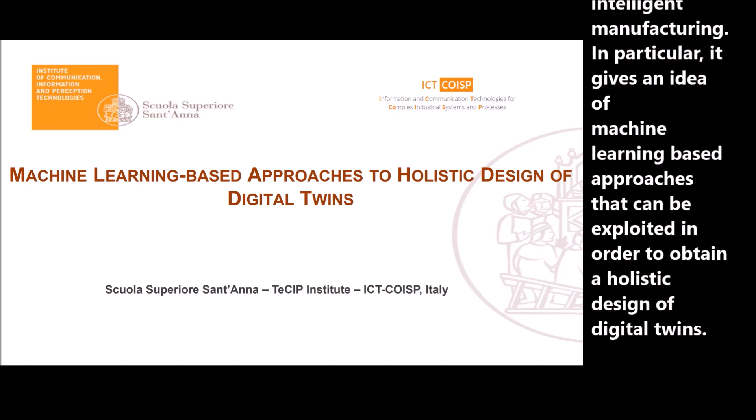This presentation describes a topic strictly related to intelligent manufacturing. In particular, it gives an idea of machine learning-based approaches that can be exploited in order to obtain a holistic design of digital twins.

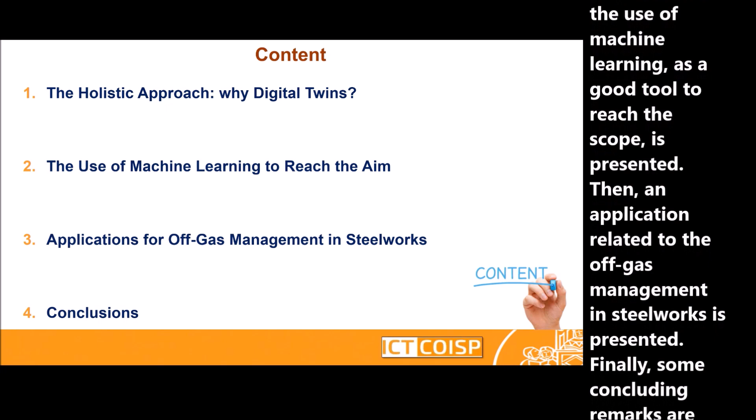The content of the presentation is shown in the slide. After a brief introduction about the holistic approach and the importance of digital twins, the use of machine learning as a good tool to reach the scope is presented. Then, an application related to off-gas management in the steelworks is presented. Finally, some concluding remarks are provided.

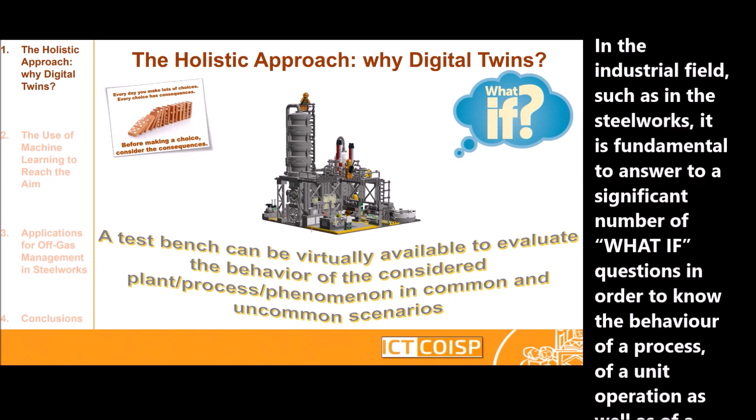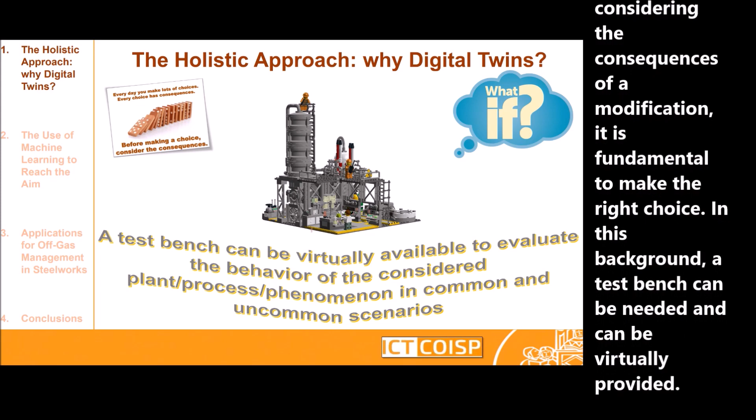In the industrial field, such as in the steelworks, it is fundamental to answer a significant number of what-if questions in order to know the behavior of a process, a unit operation, or a utility in particular scenarios. In addition, knowing and considering the consequences of a modification is fundamental to make the right choice. In this background, a test bench can be needed and can be virtually provided.

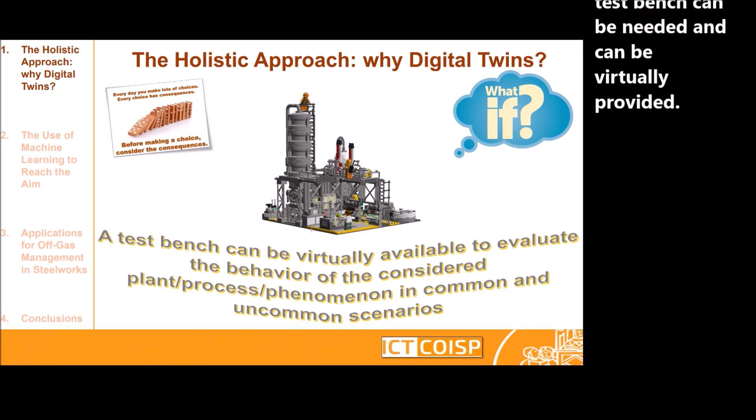The test bench can be called the digital twin of the process, the plant or the phenomenon to be analyzed. The digital twin can be used for different purposes. For instance, forecasting analysis, whose results can be used in optimization studies, could be a good example.

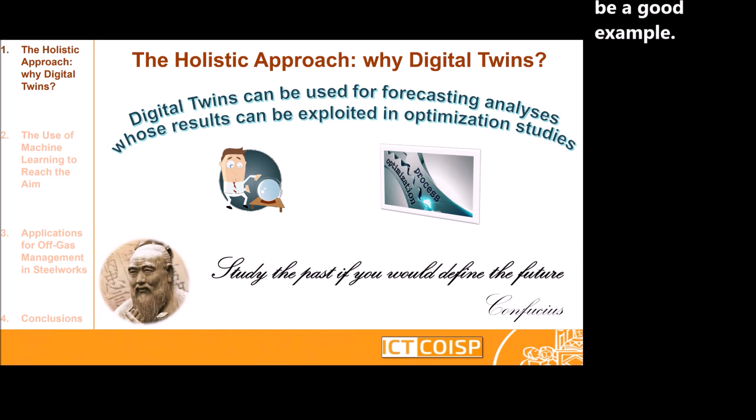The process needs to be considered as a whole, a single entity. The interaction between different components or phenomena can be neglected, and only the aspects which are relevant for a single application, analysis or study need to be considered.

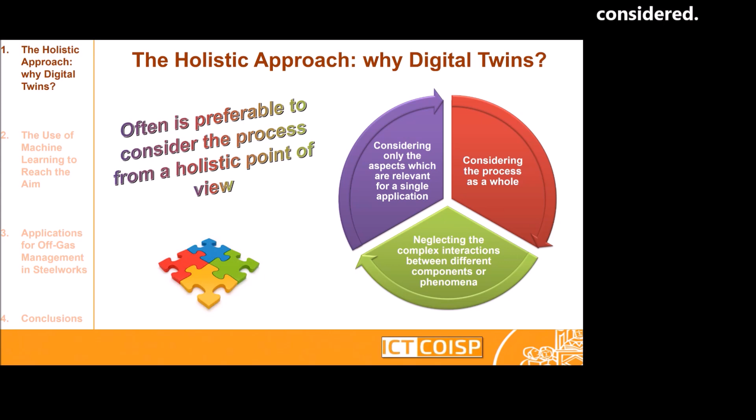By following the holistic approach, several advantages can be obtained, such as less model complexity and computational burden, as well as higher accuracy and efficiency.

Although the detailed approach considers a significant number of details by deepening each single component or sub-process, the holistic approach can address and reproduce the dynamics of complex non-linear processes, avoiding error propagation. This is because its target is only the main objective of the system to be developed.

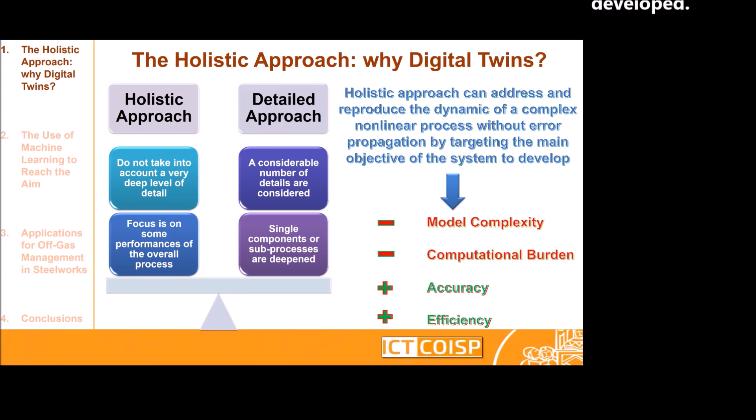Machine learning can help in the development of holistic models in terms of black boxes. In this way, phenomena having complex dynamics that depend on multiple variables can be reproduced without particular issues.

In order to show how machine learning can be used in the development of holistic digital twins related to the steelworks process, an application related to off-gas management in an integrated steelmaking plant is proposed.

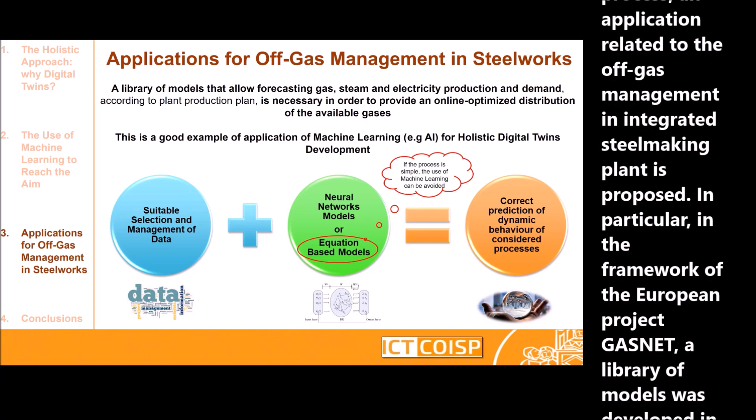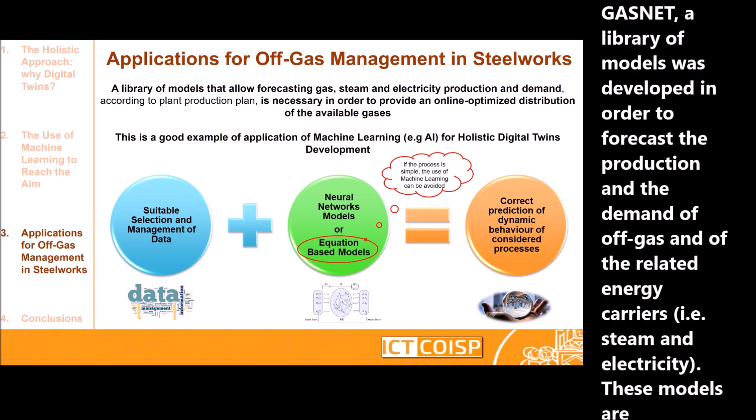In particular, in the framework of the European project GASNET, a library of models was developed in order to forecast the production and demand of off-gas and of the related energy carriers, for example steam and electricity. These models are fundamental to allow an online optimization of the distribution of available gases.

The model's development started with the selection and management of data. Then, according to the complexity of the process to be modeled, artificial neural networks were exploited for more complex phenomena, while equation-based models were designed for simpler processes. In the following slides, the most meaningful models are presented.

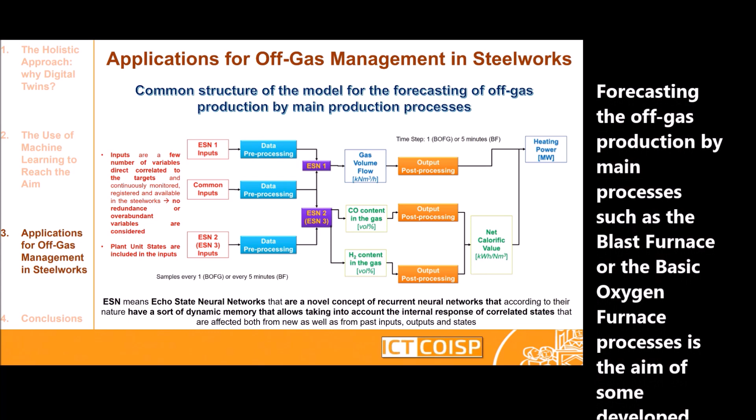Forecasting off-gas production by main processes, such as the blast furnace or the basic oxygen furnace processes, is the aim of some developed models.

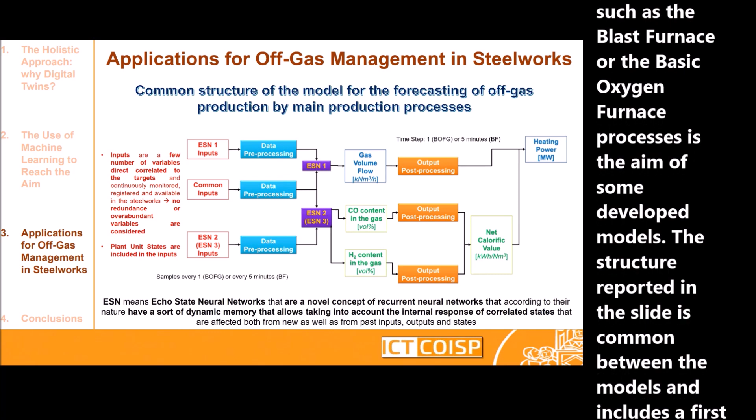The structure reported in the slide is common between the models and includes a first step of pre-processing of the input data that are specific or common to some specific trained neural networks.

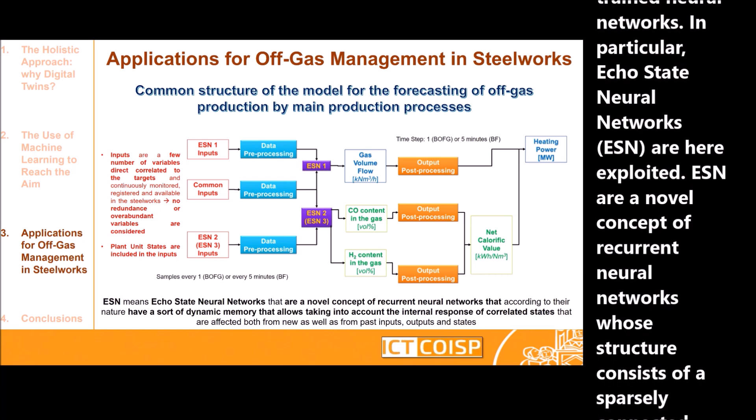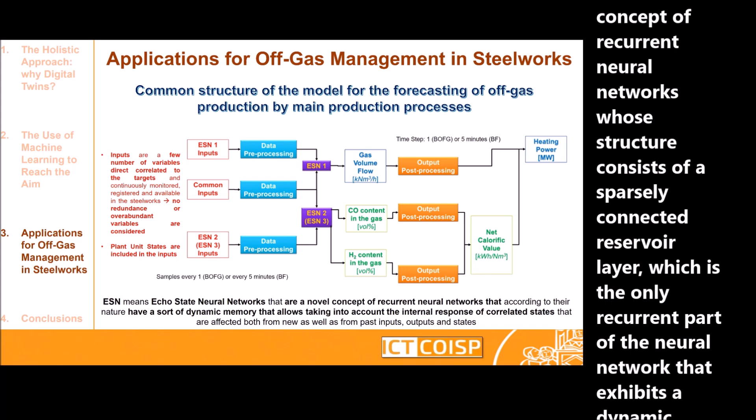In particular, echo state neural networks, here simplified as ESN, are exploited. ESN are a novel concept of recurrent neural networks, whose structure consists of a sparsely connected reservoir layer, which is the only recurrent part of the neural network that exhibits dynamic behavior, and a readout output layer.

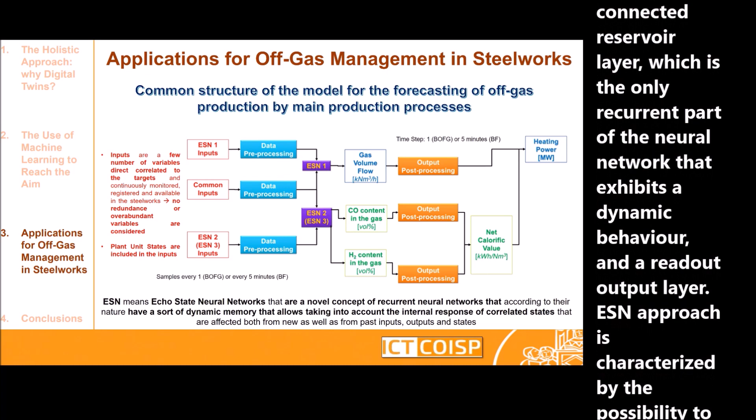The ESN approach is characterized by the possibility to draw on a rich set of dynamics generated by the reservoir in order to perform regression on a target through supervised algorithms.

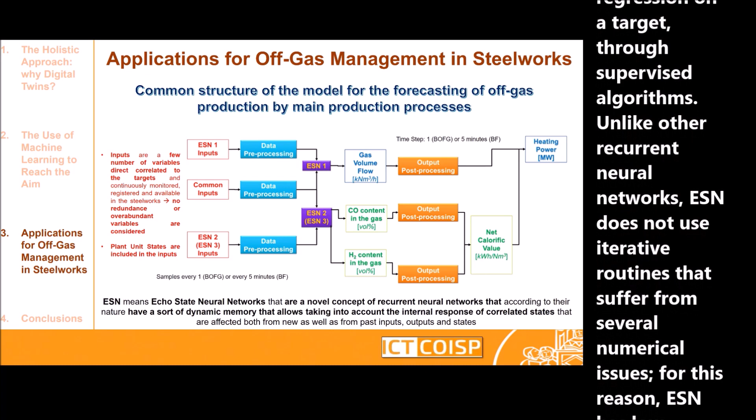Unlike other recurrent neural networks, ESN does not use iterative routines that suffer from several numerical issues. For this reason, ESN has low computational training cost and fast convergence.

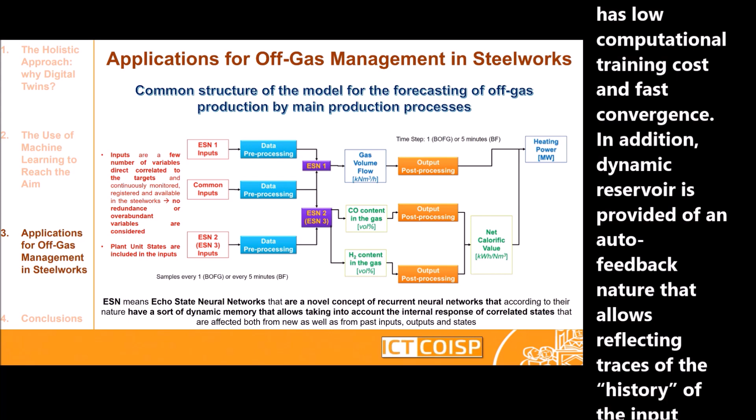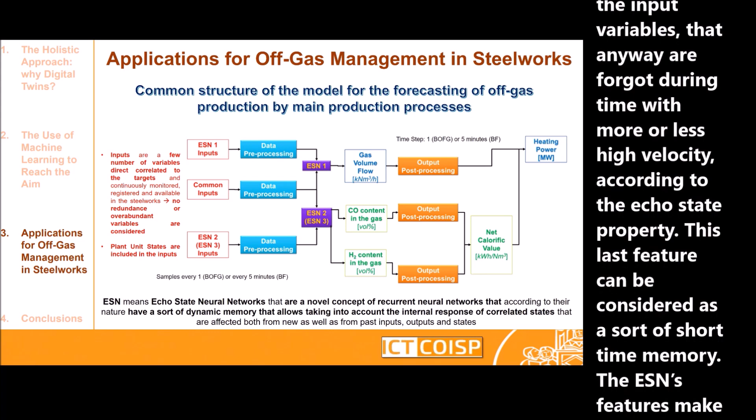In addition, the dynamic reservoir is provided with an auto-feedback nature that allows reflecting traces of the history of the input variables, which are anyway forgotten over time with more or less high velocity, according to the echo state property. This last feature can be considered as a sort of short-time memory.

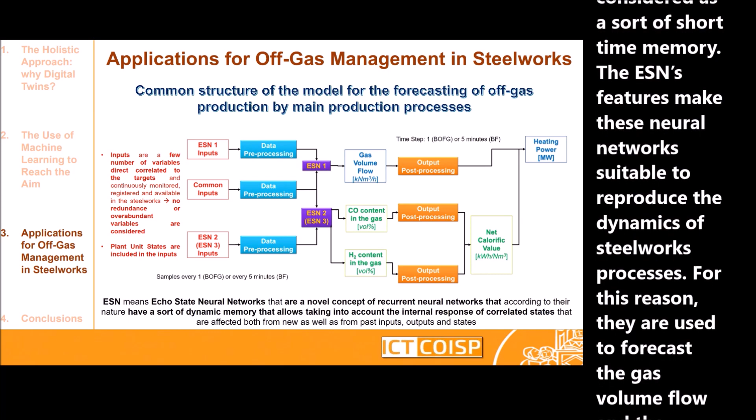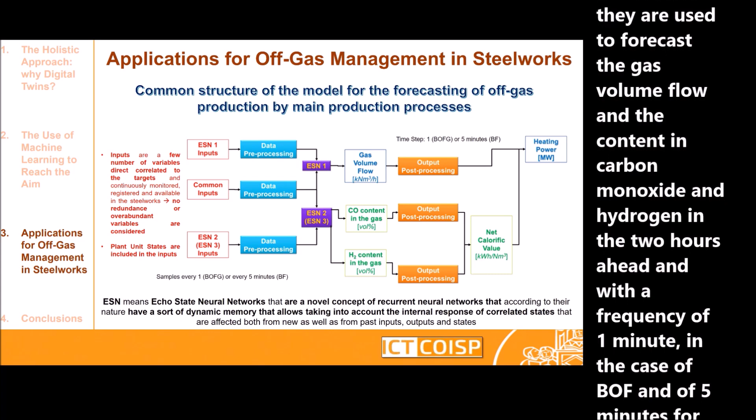These features make these neural networks suitable to reproduce the dynamics of steelworks processes. For this reason, they are used to forecast the gas volume flow and the content in carbon monoxide and hydrogen, 2 hours ahead with a frequency of 1 minute in the case of BOF, and 5 minutes for BF.

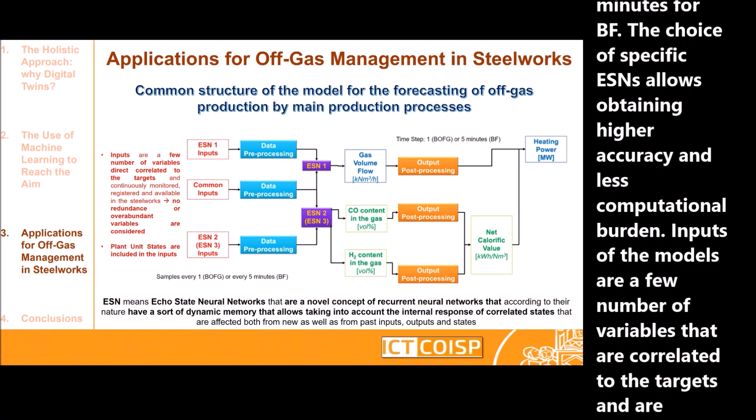The choice of specific ESNs allows obtaining higher accuracy and less computational burden. Inputs of the models are a few variables that are correlated to the targets and are continuously monitored, registered, and available in the steelworks.

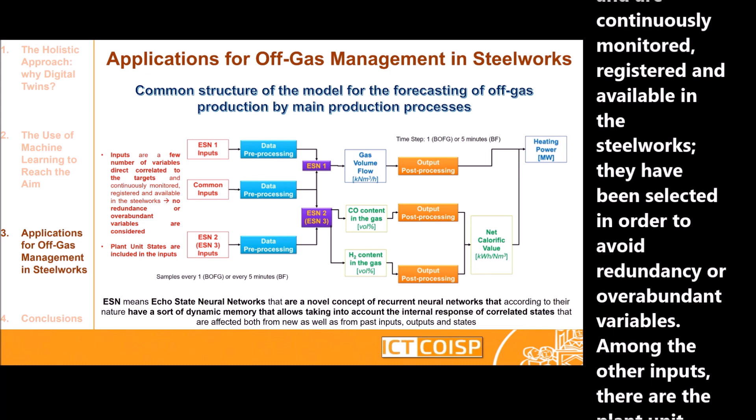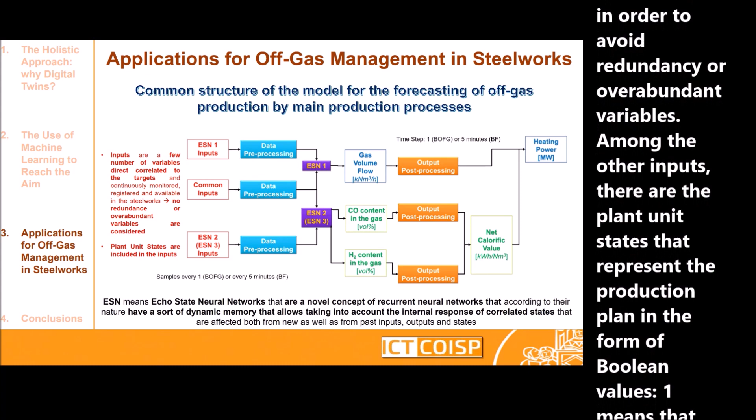They have been selected in order to avoid redundancy or overabundant variables. Among the other inputs, there are the plant unit states that represent the production plan in the form of Boolean values. 1 means that the furnace is in operation, while 0 stands for the switch off of the furnace.

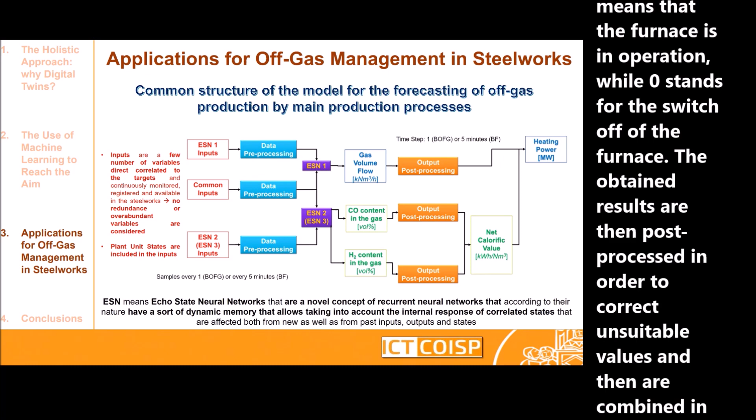The obtained results are then post-processed in order to correct unsuitable values, and then are combined in order to obtain the net calorific value of the off gas and its intrinsic heating power.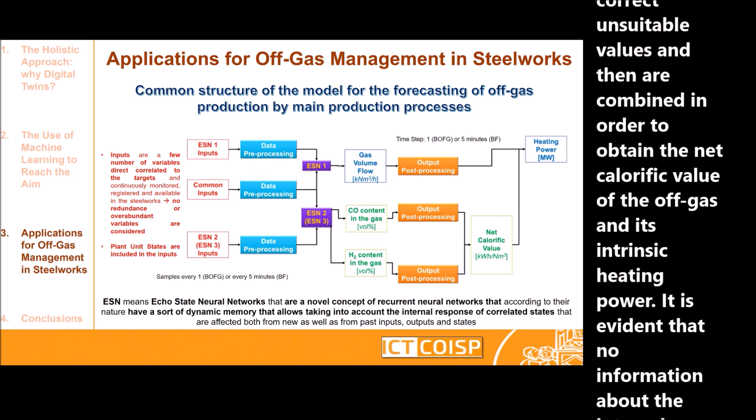It is evident that no information about the internal phenomena of the process is taken into account from the physical or chemical point of view. Only the real objective is considered, in a holistic view of the process.

An example of prediction in the case of blast furnace gas production model is shown in this slide. The values in the graphs are normalized for confidentiality reasons, and the forecasting values are compared with the real ones.

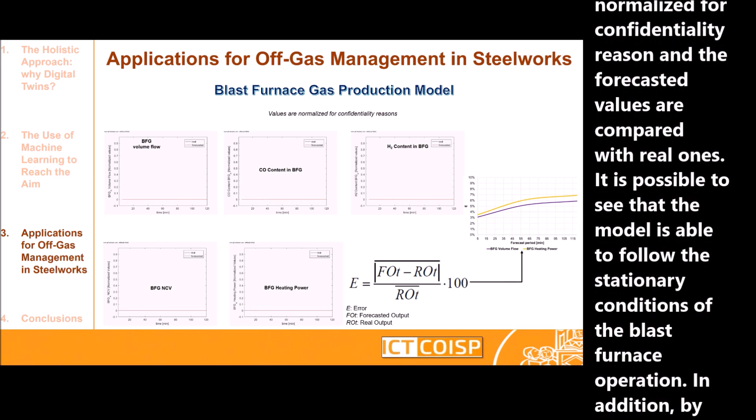It is possible to see that the model is able to follow the stationary conditions of the blast furnace operation. In addition, by watching the animated figures as it progresses, it is possible to see how the model allows a right prediction of transitory conditions, such as when the blast furnace operation is stopped.

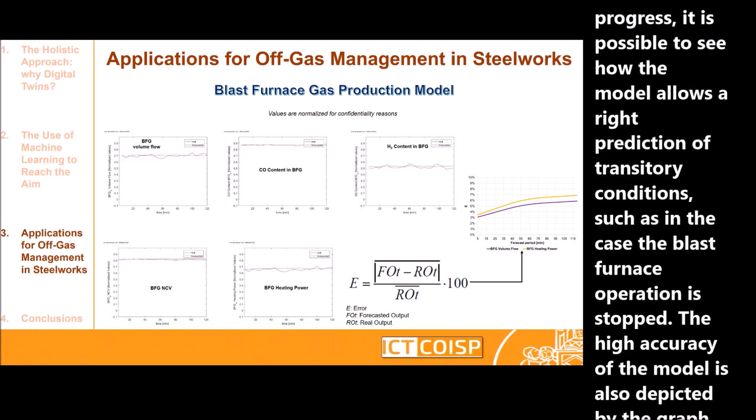The high accuracy of the model is also depicted by the graph related to the error defined in the slide. It is less than 6% for the gas volume flow and 7% for the heating value, due to the propagation of some errors, because this last variable is obtained by the combination of other different forecasted variables.

Obviously, highest errors correspond to values more ahead in time.

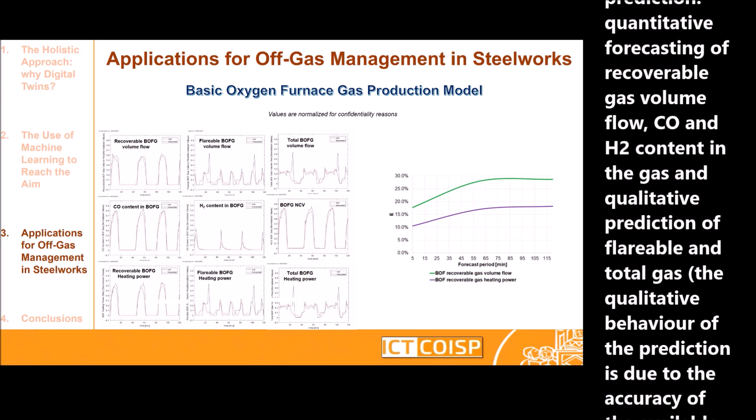on flareable and total gas. The qualitative behavior of the prediction is due to the accuracy of the available data.

The combination of predicted variables gives the net calorific value of the gas and the related heating power.

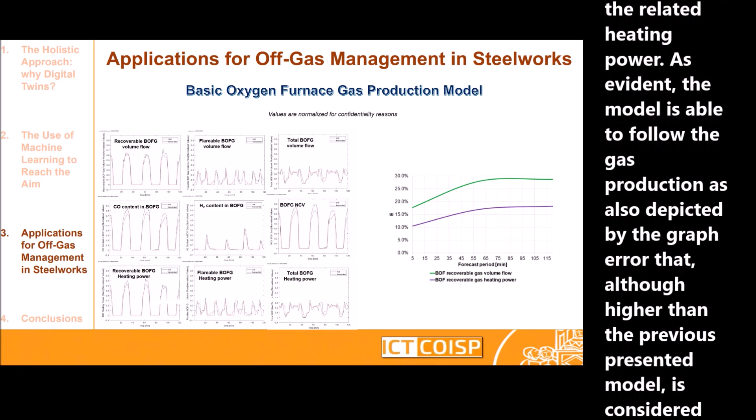As is evident, the model is able to follow the gas production, as also depicted by the graph error that, although higher than the previously presented model, is considered acceptable because of the complexity of the process.

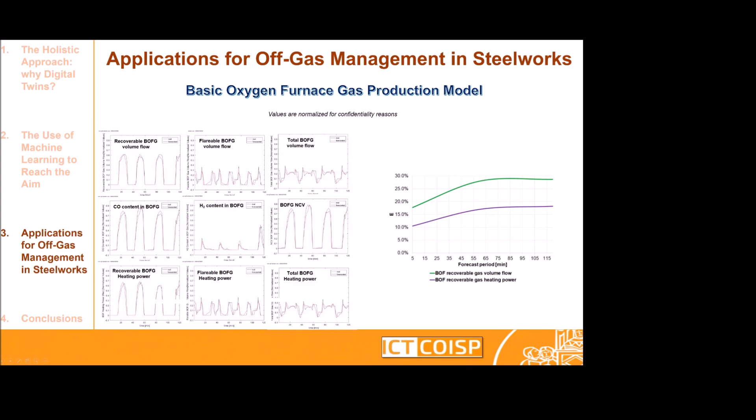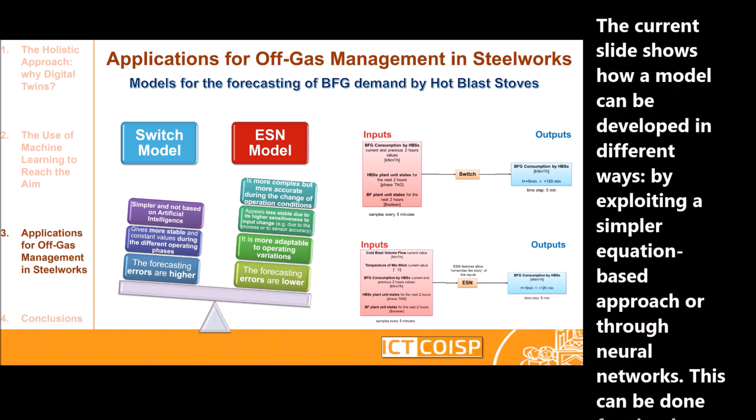The current slide shows how a model can be developed in different ways, by exploiting a simpler equation-based approach or through neural networks.

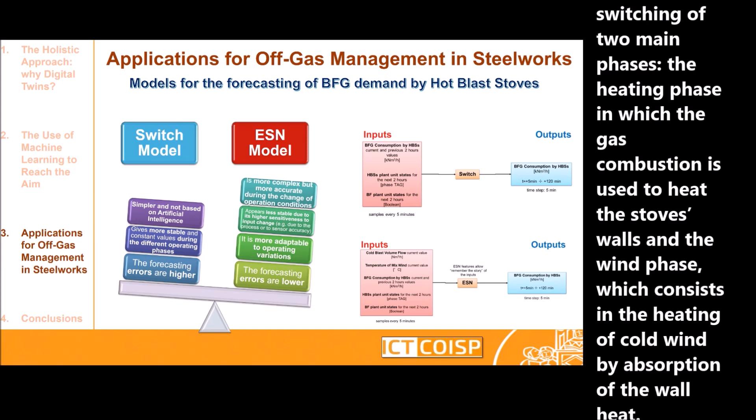This can be done for simple processes, such as the use of blast furnace gas by hot blast stoves. Indeed, the operation of hot blast stoves is regular because of the systematic switching of two main phases: the heating phase, in which gas combustion is used to heat the stove's walls, and the wind phase, which consists in the heating of cold wind by absorption of the wall heat.

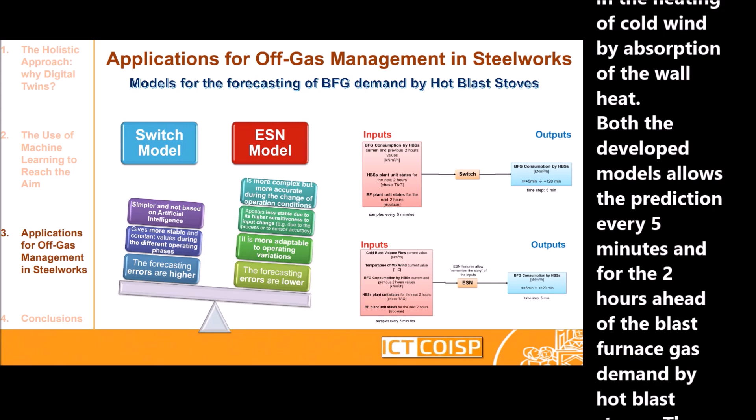Both the developed models allow the prediction every 5 minutes and for the 2 hours ahead of the blast furnace gas demand by hot blast stoves.

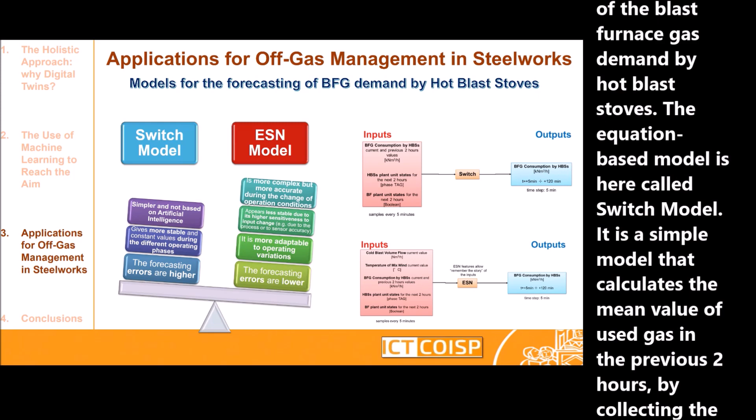The equation-based model is called the switch model. It is a simple model that calculates the mean value of used gas in the previous 2 hours by collecting the measurement of real consumed gas. Then, it provides the gas demand for the next 2 hours according to the stove's phase TAG, provided by the facility, representing the alternation of the heating and wind phases for the next 2 hours.

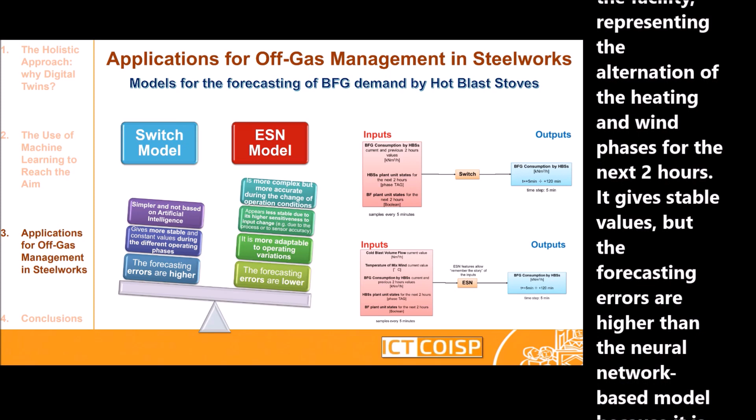It gives stable values, but the forecasting errors are higher than the neural networks based model, because it is less sensitive to change in operating conditions.

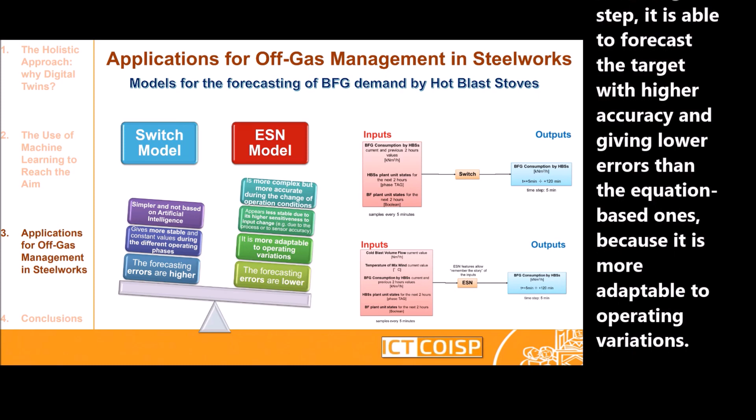The other model is based on ESN. After training step, it is able to forecast the target with a higher accuracy and giving lower errors than the equation-based ones, because it is more adaptable to operating variations.

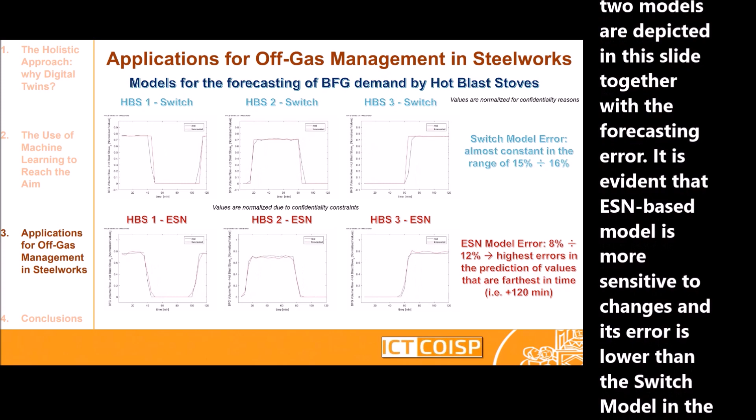Results of the two models are depicted in this slide, together with the forecasting error. It is evident that the ESN-based model is more sensitive to changes, and its error is lower than the switch model in the whole forecasting horizon.

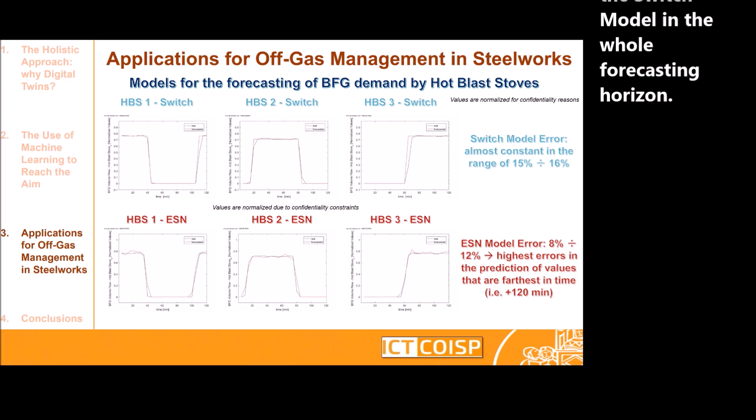A simple neural network was exploited in the development of a model for the prediction of electrical power production by the blast furnace gas expansion turbine.

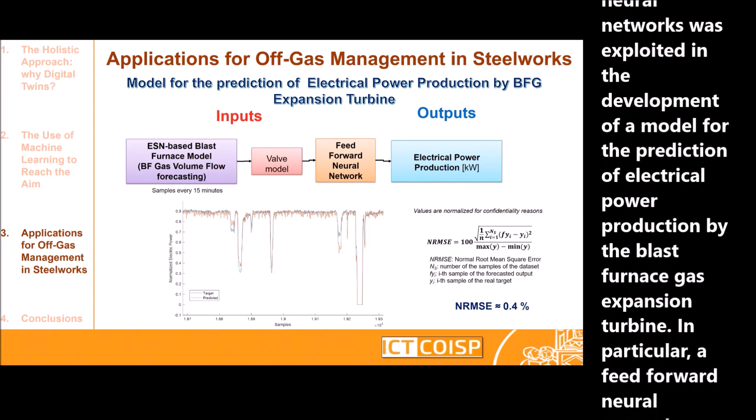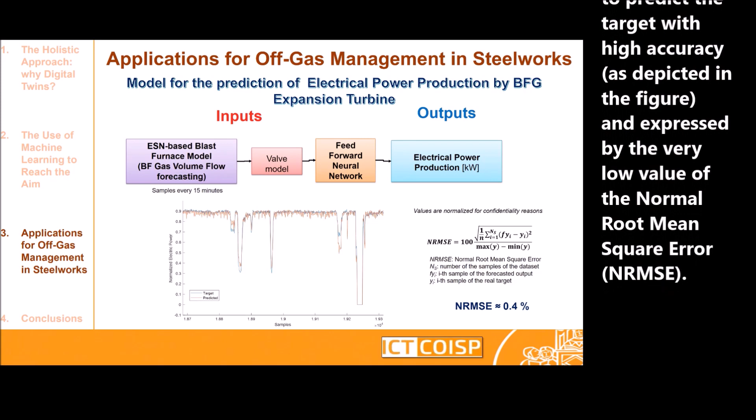In particular, a feed-forward neural network works in cascade with respect to the ESN-based blast furnace gas forecasting model and to a valve model, to predict the target with high accuracy, as depicted in the figure, and expressed by the very low value of the normal root mean square error.

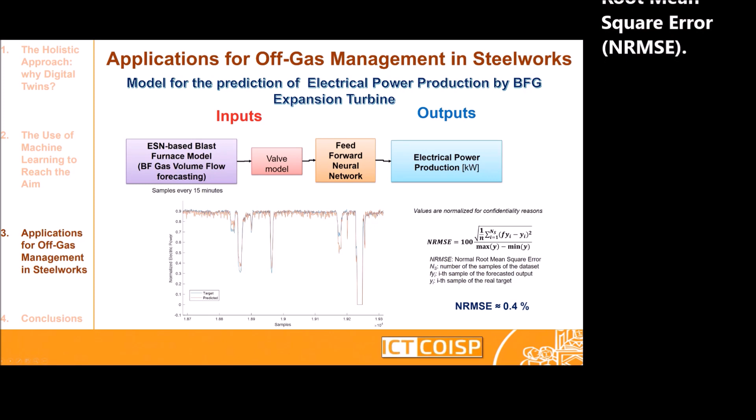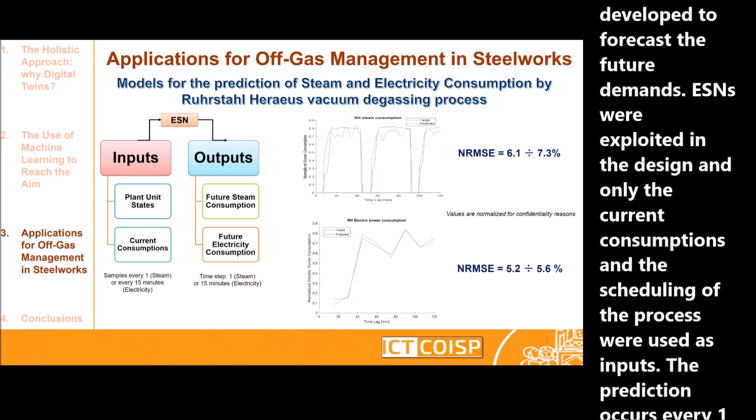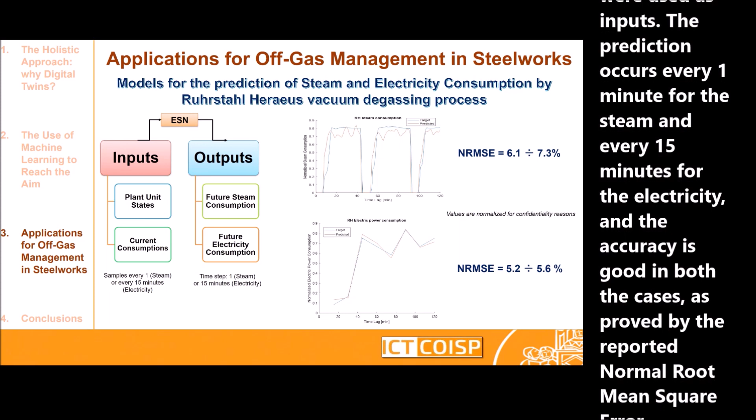The Ruhrstahl Heraeus vacuum degassing process consumes steam and electricity, and two models were developed to forecast the future demands. ESNs were exploited in the design, and only the current consumptions and the scheduling of the process were used as inputs. The prediction occurs every 1 minute for the steam and every 15 minutes for the electricity, and the accuracy is good in both cases, as proved by the reported normal root mean square error.

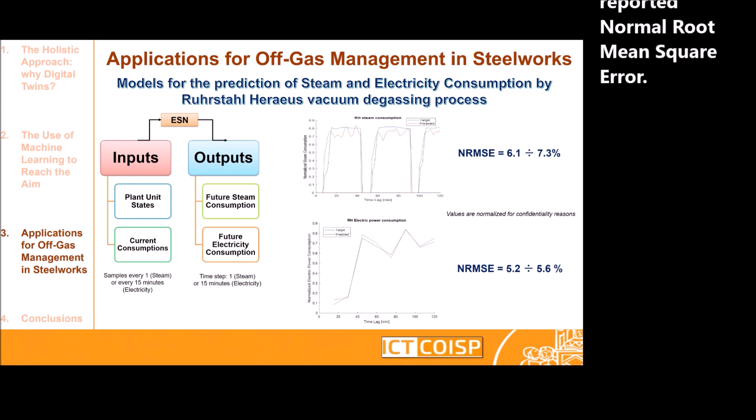The last model that can be used in the optimization of the off-gas and related energy carriers management is an ESN-based model that allows the forecasting of the electricity demand by the fans used to feed the blast to the blast furnace.

The prediction occurs every 15 minutes and for the 2 hours ahead. The model is fed by the inputs that are more correlated to the target. Among them, there is also the values of blast furnace gas volume flow for the next 2 hours, and for this reason, it works in cascade to the model that allows the prediction of these variables. As visible from the animated figure and from the error, the model is able to fulfill this objective.

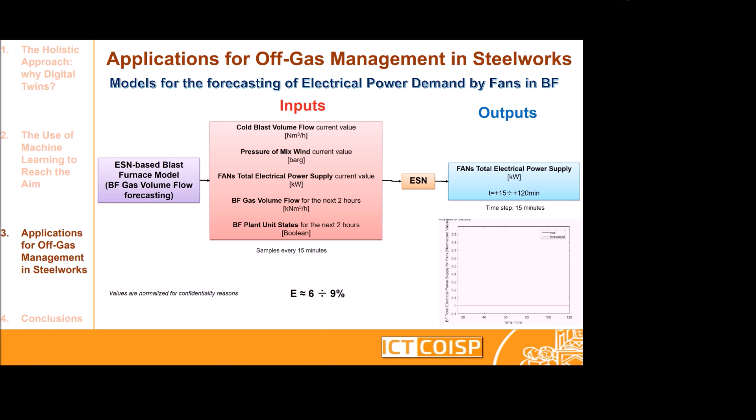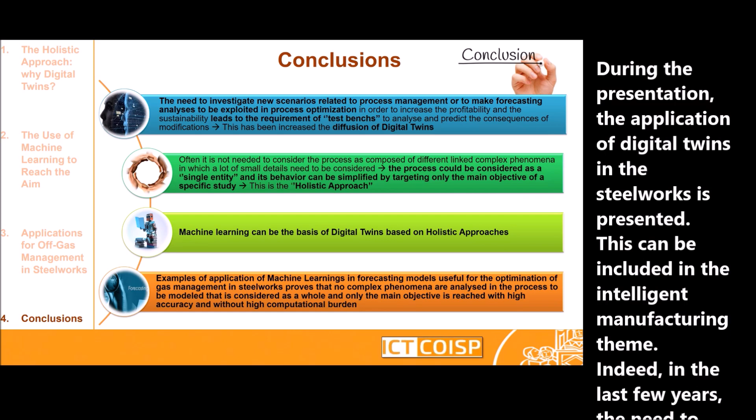During the presentation, the application of digital twins in the steelworks is presented. This can be included in the intelligent manufacturing theme.

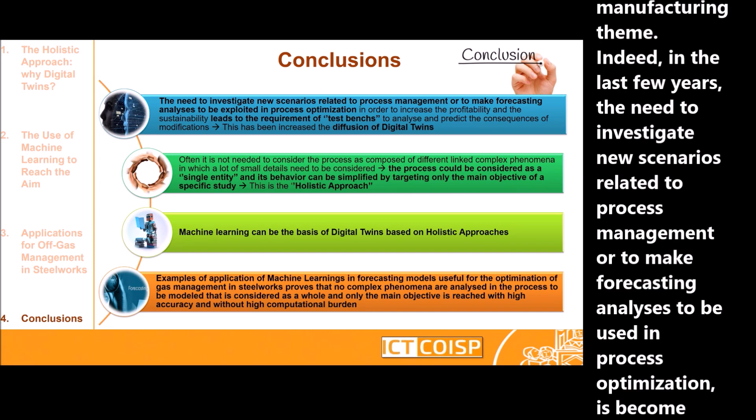Indeed, in the last few years, the need to investigate new scenarios related to process management or to make forecasting analysis to be used in process optimization has become ever more fundamental. This results in improving the industry competitiveness since it is strictly linked to the profitability and sustainability.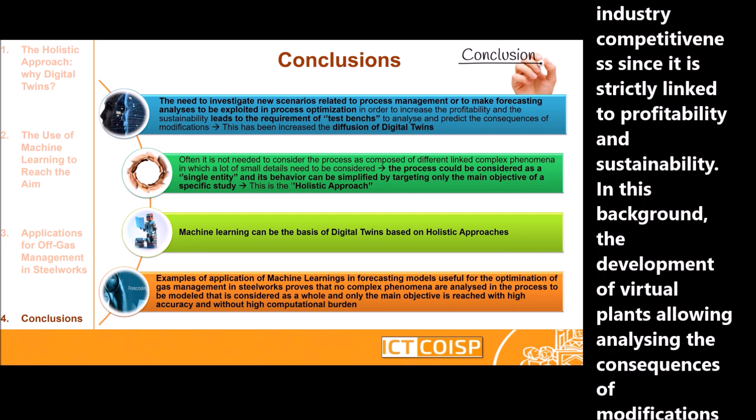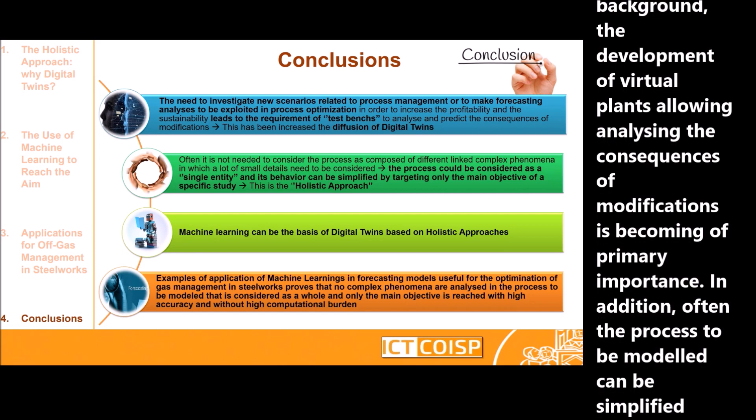In this background, the development of virtual plants allowing analyzing the consequences of modification is becoming of primary importance. In addition, often the process to be modeled can be simplified, considering it as a single entity which focuses only on a main objective. This is what can be called the holistic approach.

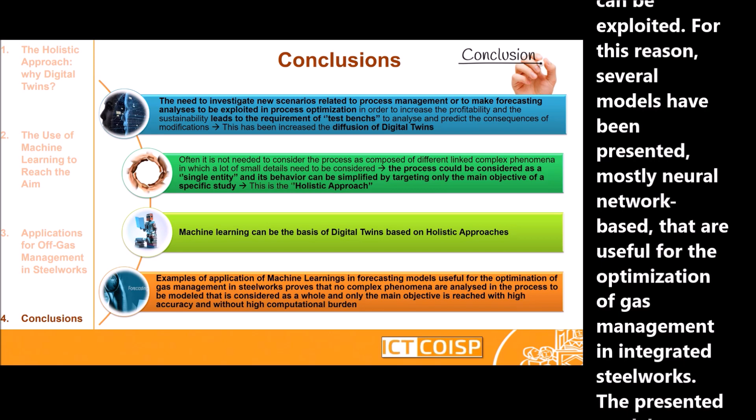In order to fulfill the previous listed needs, machine learning approaches can be exploited. For this reason, several models have been presented, mostly neural network based, that are useful for the optimization of gas management in integrated steelworks.

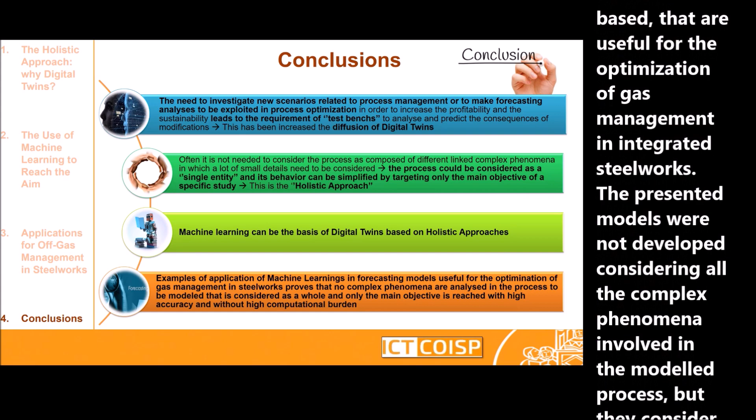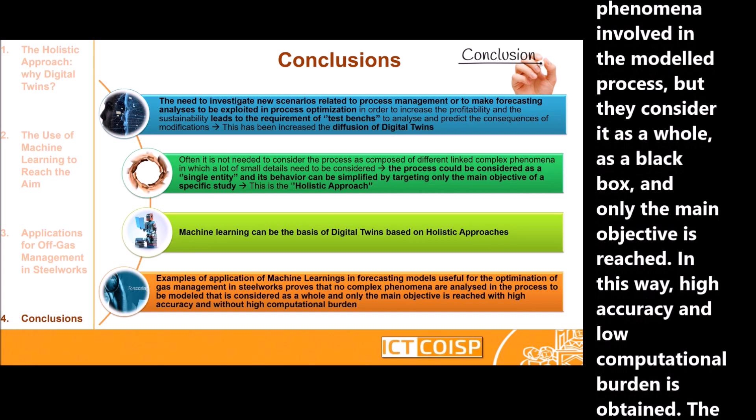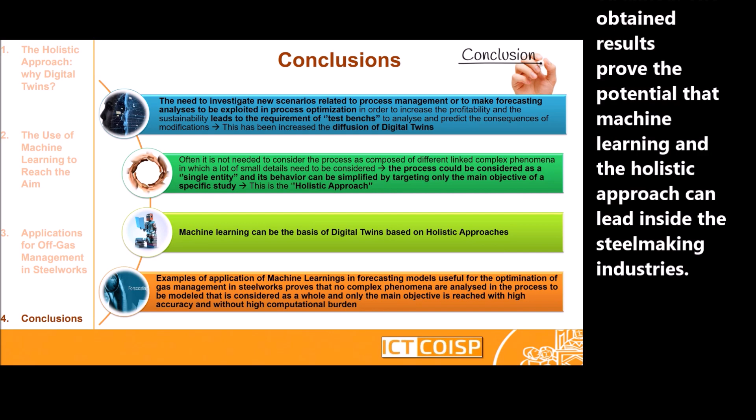The presented models were not developed considering all the complex phenomena involved in the modeled process, but they consider it as a whole, as a black box, and only the main objective is reached. In this way, high accuracy and low computational burden is obtained. The obtained results prove the potential that machine learning and the holistic approach can lead inside the steelmaking industries.